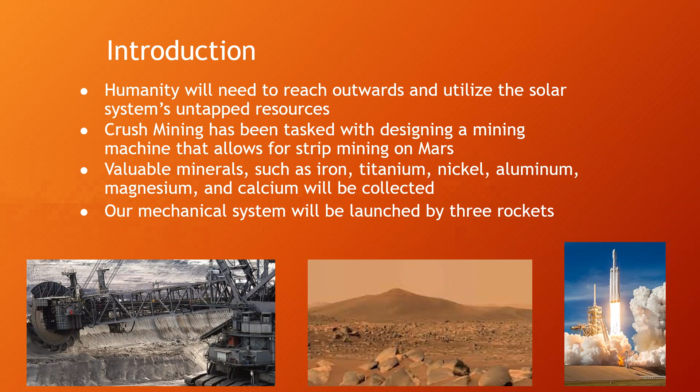Our company, Crush Mining, has been given the honor of designing a mining machine that allows for strip mining on Mars. Our mechanical system will be similar to mining machines on Earth, however, modified to survive on Mars. The system will be launched by 3 rockets.

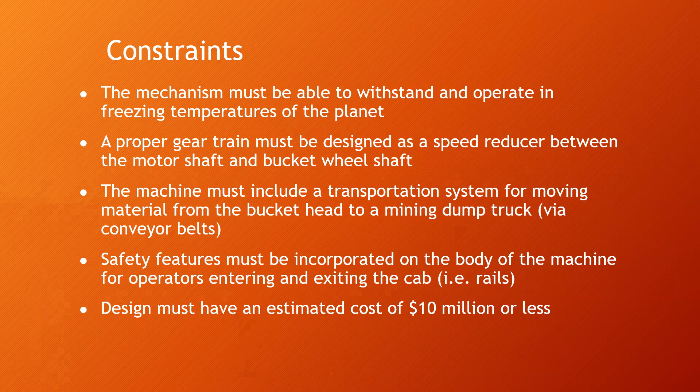So here are the main constraints for our design. The mechanism must be able to withstand and operate in freezing temperatures of this planet. A gearbox must be designed as a speed reducer between the motor and the bucket wheel. And the machine should have some transportation system for moving the minerals from the bucket wheel to the dump truck. And also safety features need to be incorporated for the operators to easily enter and exit the cab. So for this design, the estimated cost should be no more than $10 million.

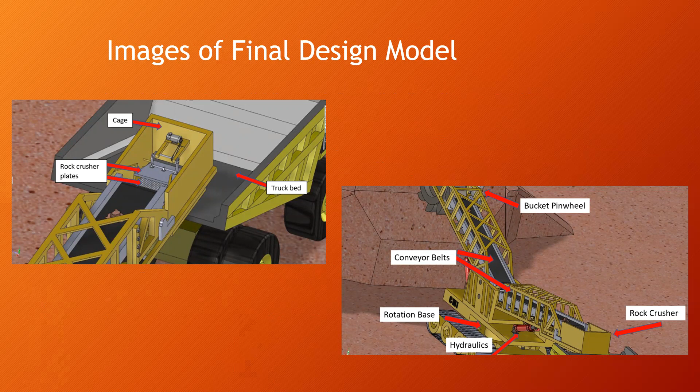The final design for our machine consists of a motor-driven bucket wheel as seen in this motion study. As the bucket wheel rotates, each bucket digs into the mountainside and extracts a lump of minerals. These minerals are then transported down the length of the machine on the conveyor belts and then are directed into the rock crusher where they'll be crushed and collected into the dump truck for further processing.

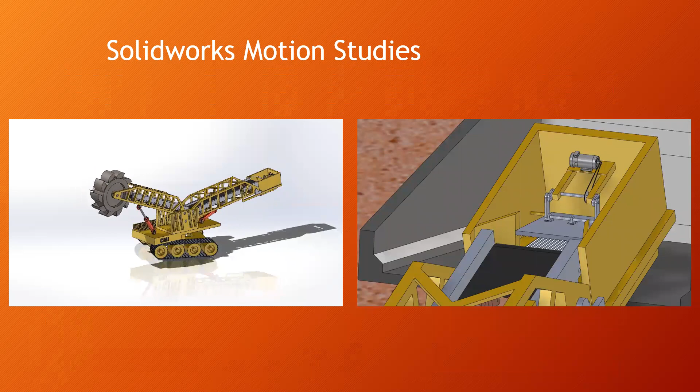Now looking at the left side first, you can see both support arms are situated on a base that is free to rotate 360 degrees about its center, ensuring that it can mine along a mountainside and can be maneuvered as needed to mine various parts of the mountainside. The base itself sits on top of heavy-duty tracks, and these tracks allow the machine to navigate across the difficult terrain.

Now looking at the rock crusher system on the right side, you can see it is a system comprised of 2 main plates that break up the large rocks. The top plate is attached to an electric motor by a chain drive and is designed to oscillate back and forth, breaking up any large rocks, while the bottom plate is fixed to the protective cage that surrounds the rock crusher.

Okay, so calculations and analysis were also a major part of this project. Overall, we did ball bearing life, fastener length, and fastener stiffness, gear train speed and torque, and then fatigue failure. Today, we're only going to talk about the last 2. So on this slide, you can see that we're going to use gears with a 20-degree pressure angle and a pitch of 3.2 teeth per inch. We're going to want to reduce our speed down to around 11 or 12 RPM. So that ended up being a decrease of around 107. And then you can see the torque after the whole gear chain will be about 1.1 million pound-inches.

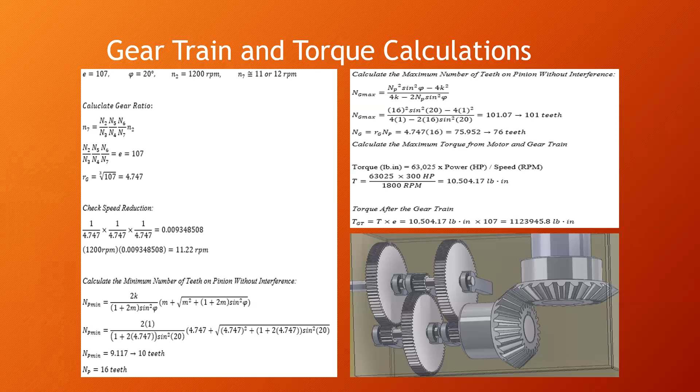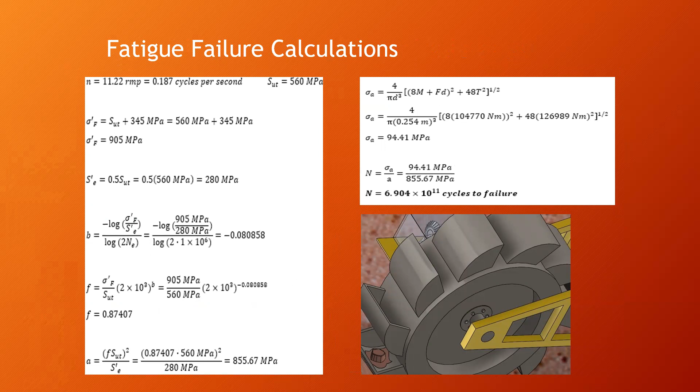And then this is our fatigue failure calculations. So using that same 11 RPM, and the specialized steel meant for cold temperatures with an ultimate stress of 560 MPa, we calculated the cycles to failure, which ended up being 6.9 times 10 to the 11 cycles, so this should not break any time in its lifetime without serious misuse.

So in conclusion, there still needs to be more analysis done on the subassemblies. First thing is the fasteners and brackets. We expect that we will need more to support all the components. We also question if a 300 horsepower motor is too much powering the bucket wheel. It could cause damage to the gear and gearbox as well as the pinwheel. Lastly, our design is rated for negative 60 degrees Celsius. However, a lot of temperatures on Mars could get colder than that.